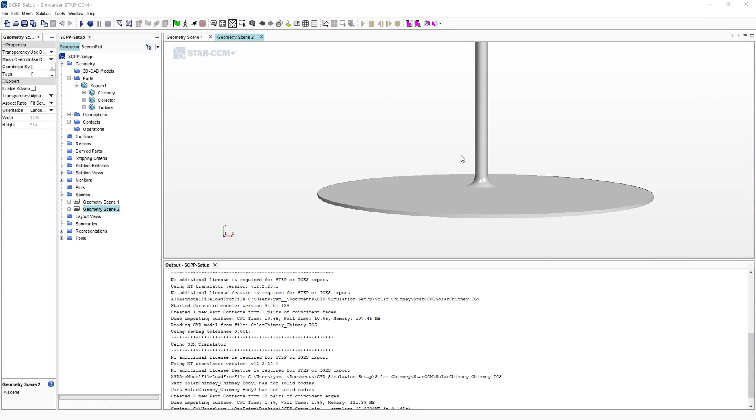Once you import your SolidWorks model into your STAR-CCM+, you should be able to visualize your geometries.

To visualize this, you just go here and click geometries, and it will show up. You can zoom in and zoom out.

Here you have the assemblies, and you have different components. If you click on it, you have the chimney, the collectors, and then the turbine.

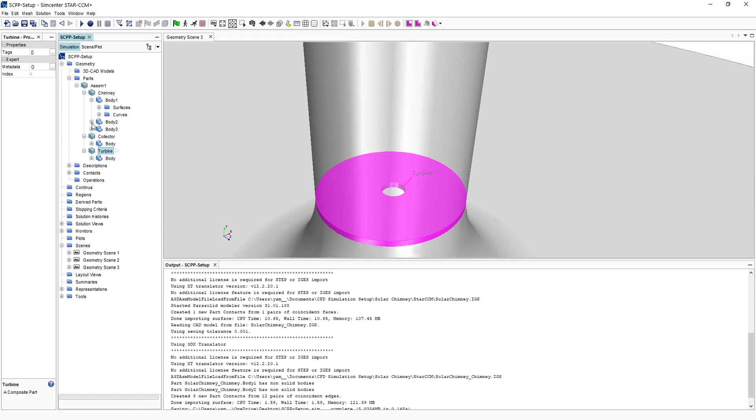If you expand out your chimney, you have different bodies inside.

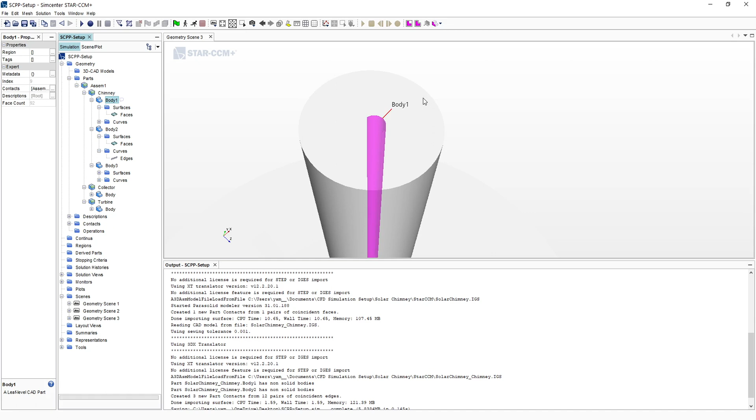This chimney will be just one whole chimney. Remember that we created two cylinders, and because of this we now have two of these surfaces. These surfaces will not serve a purpose for your simulations, since it's actually just one whole chimney, so we can remove this.

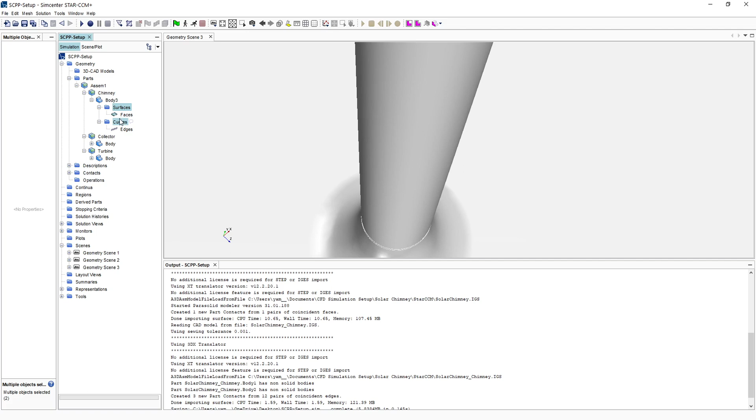So we have the remaining surfaces, and if you wish to simplify it, we can move this folder and place it inside chimney. You can rename this one as a body.

What we can do at this point is define the boundaries. These faces represent faces of the entire chimney, so what we can do is split it. If we split by patch, we are able to see this chimney made out of different surfaces.

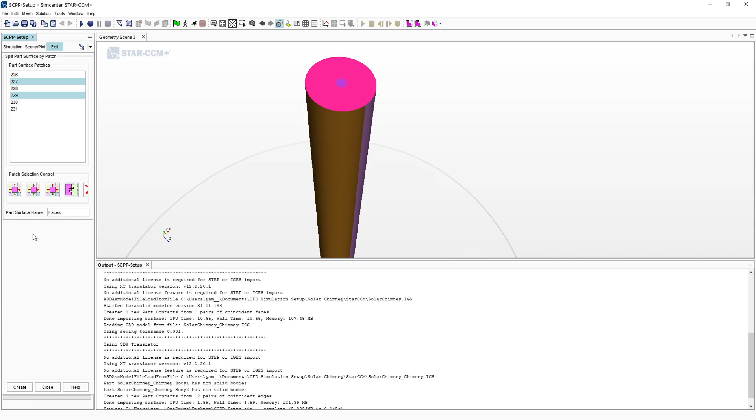This will be the outlet. You can select this one, and select this and this, both of them, and name it as outlet.

These are the chimney wall. You can select it as well, both of these, and name it as chimney wall.

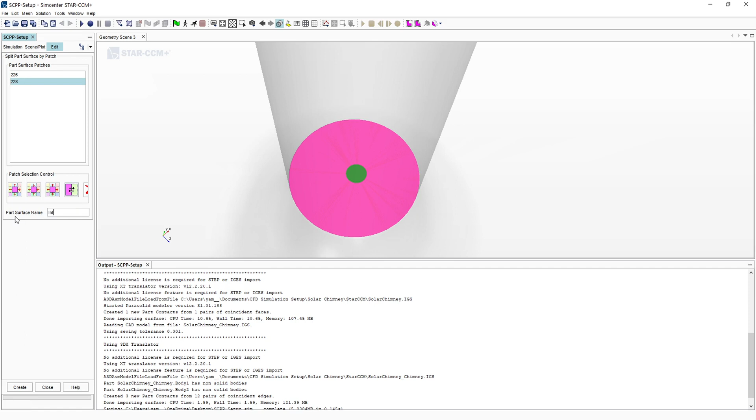Lastly, if we zoom in, we have this, which represents the interface between your rotating turbine regions and your chimney, and the bottom of the chimney. So you can say this is the interface, and the remaining...

...you can name this one as the inner surface.

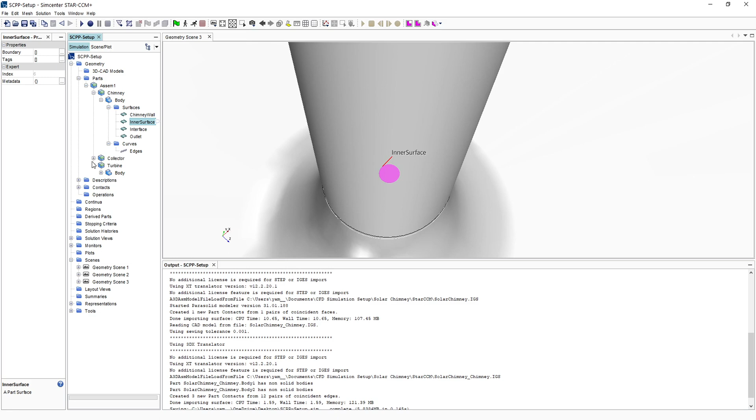Now we will do the same to your collectors. This is your collectors, and the collectors are made out of different faces as well, which you can split.

So this is the interface between your collectors and the rotating turbine. You can name it as an interface.

This is the ground, and this is the inlet.

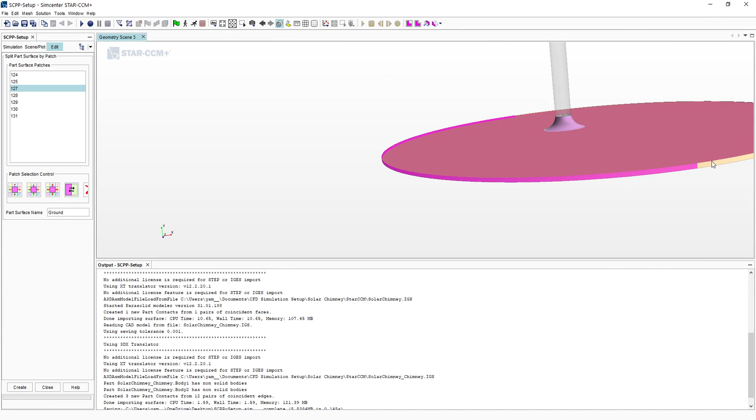So there are two parts. This is the ground, and this is the collector itself. Now the remaining are either the cover or the solar chimney, and the rest - you have the turbine base, which you can name base.

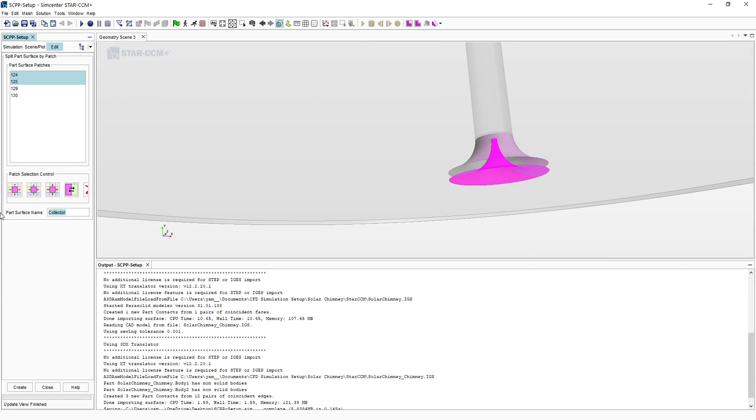You can combine these two and your collector surface, combine it, and call it collectors. Alright, so that's your collectors.

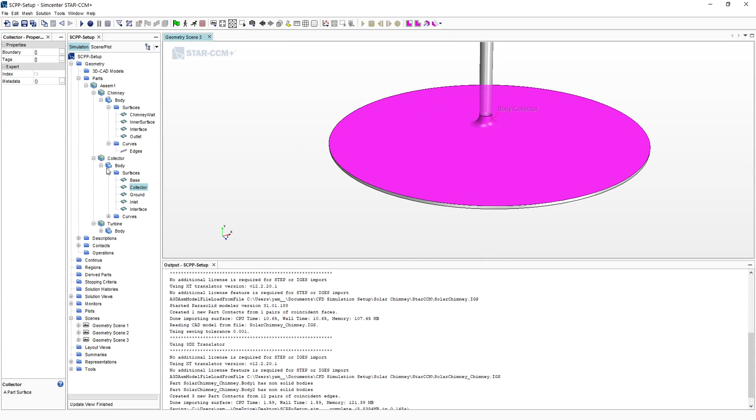Now we move on to the turbine.

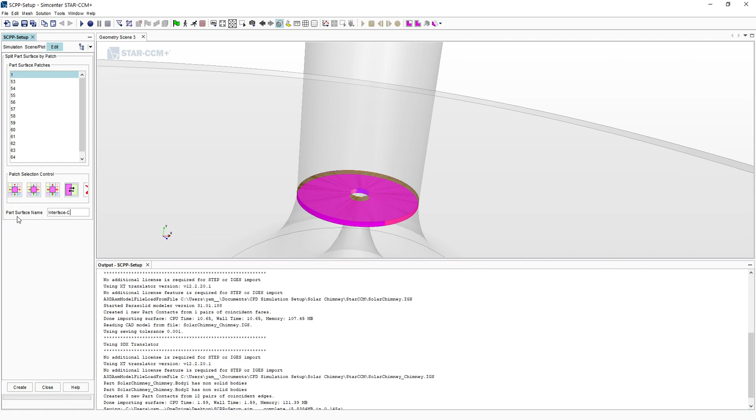So this is the interface between your turbine domain and your collectors. The top part between is the interface between your chimney and your turbine domain.

You have these two, which you can name as a wall.

So the remaining really are the blades, and also the body of the blades, which you can collectively name as blades. You can do that, and name it here.

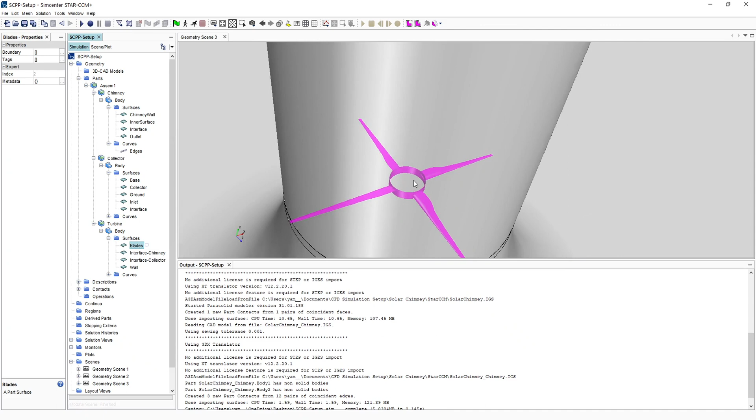So that's how you define and provide your naming for your boundaries.

So the next step is to create new regions.

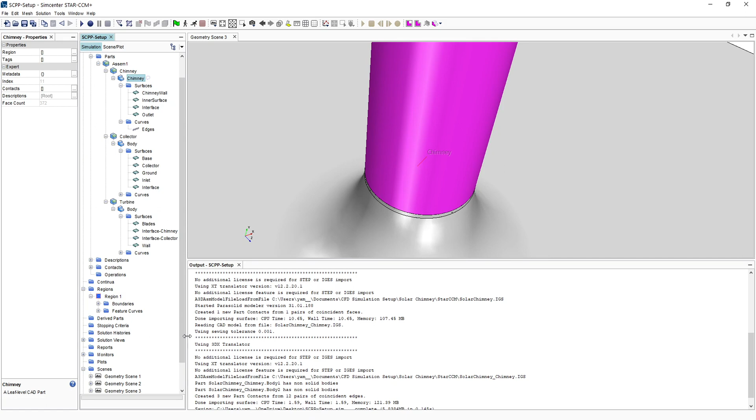We will have regions for the collectors and regions for the chimney, and they are not moving. You can rename this one as chimney, as collectors, as turbine.

We can simplify it by removing it from the groupings, so we can simply delete this. Now it's much simpler, and we should be able to recognize the different parts here.

So we will put the collectors and chimney together and name it as fluids.

We create new regions for the turbine, and name this one as rotating.

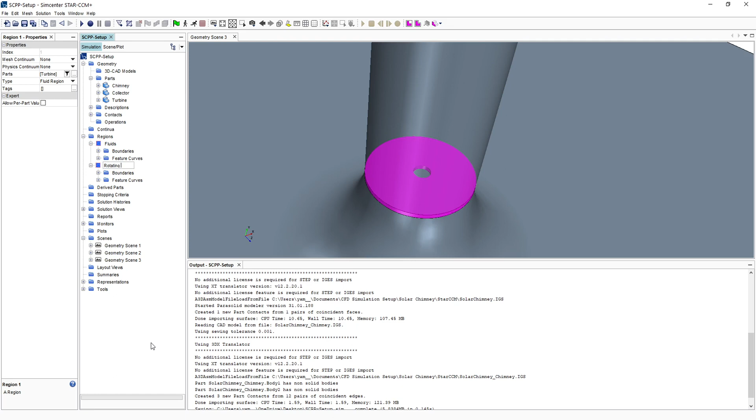So now we create a new physics continua. This is basically defining the boundary, the governing equations to solve the solutions. This will be a three-dimensional problem.

We can have a gas inside, so it's implicit unsteady. We can use segregated flow, constant density with Boussinesq. You have to select the fluid temperature model, use a turbulent model, and use K-epsilon.

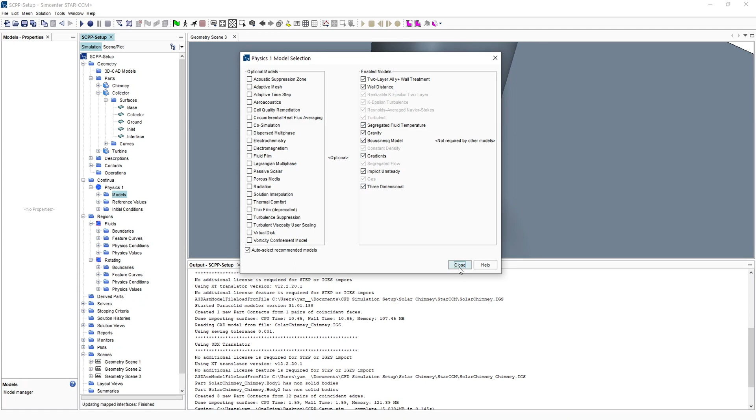So this is all you need in order to set up your problem, and you can name this one as gas.

You need to double check your gravity, make sure your gravity is along the y direction. So put here your gravity.

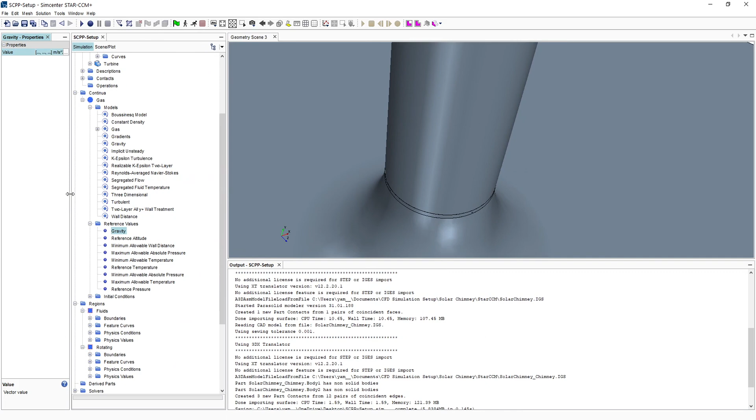You have to also set your reference temperature correctly. This will be the ambient temperature, and you can set this one to be 300. So you have the initial temperature at 300 as well.

Having defined all those, we can move on to defining the boundary conditions.

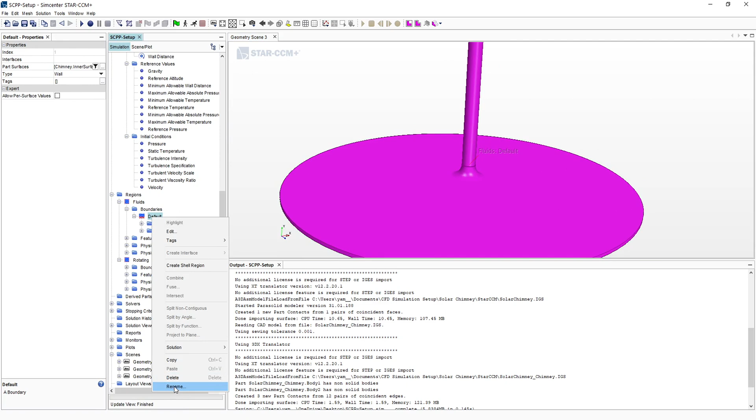The default is wall. So in your fluid domains, what will be wall? You can name this one your chimney wall, and select your chimney wall.

Create new - this is your collectors, so you can select collectors. Collector will be wall as well.

And these two bits, we're going to have them acting like a wall, with adiabatic thermal specifications. So we're assuming there is no heat transfer through the wall, both collectors and the chimney.

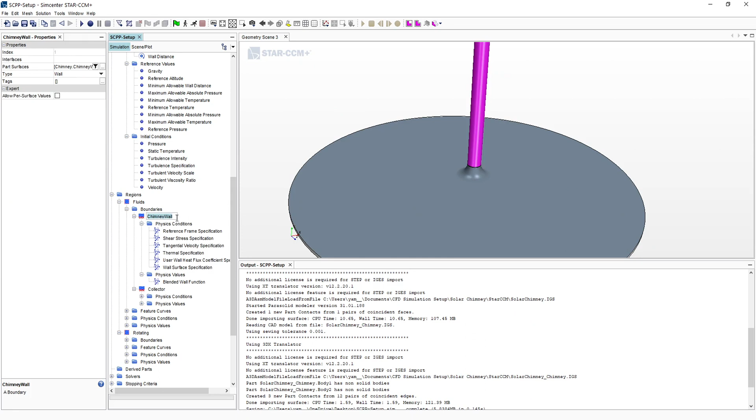Now move on to other boundary conditions, your outlets. So this is the pressure outlet.

We define the inlet using the pressure outlet as well.

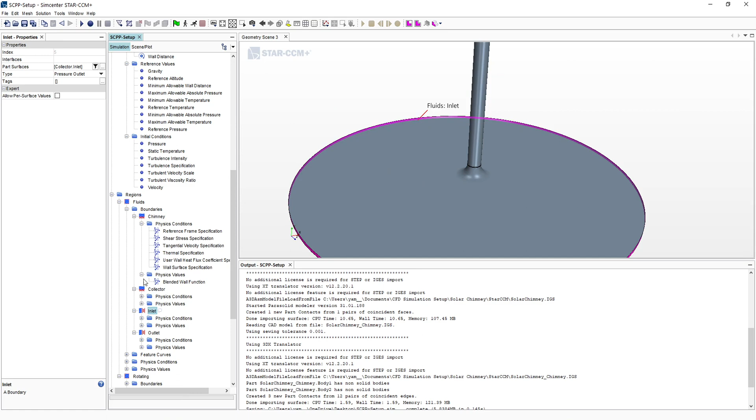So your ground will be a wall as well. Because the ground absorbs heat, you need to include a heat flux for your ground, and it would have a value of 300.

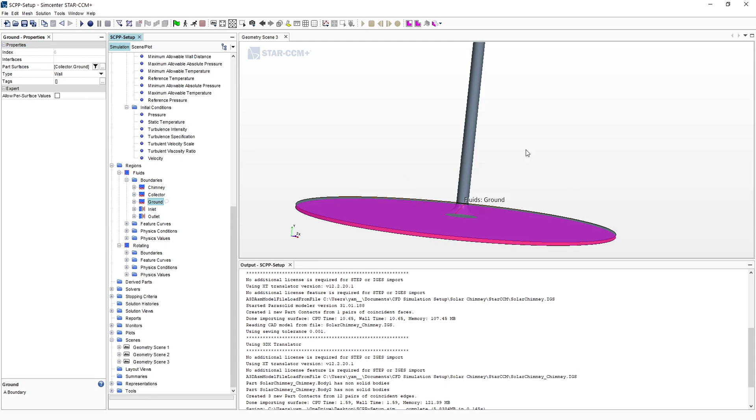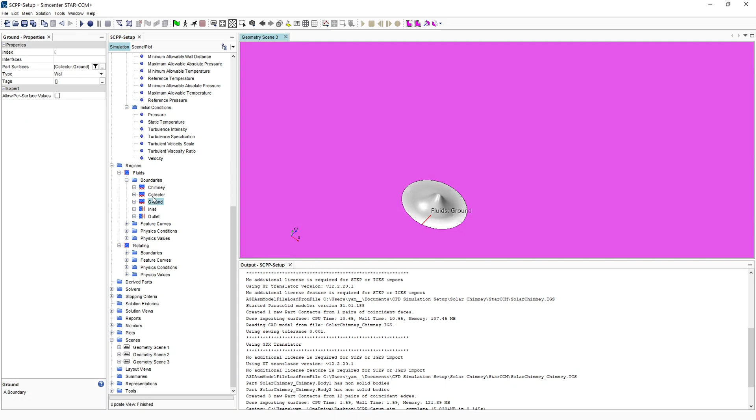Now we still have remaining boundary conditions that we need to specify. So we need to specify the base as well. The base will be a wall. We can assume that this is the base, and select your base, and it is adiabatic as well. It's not absorbing any heat.

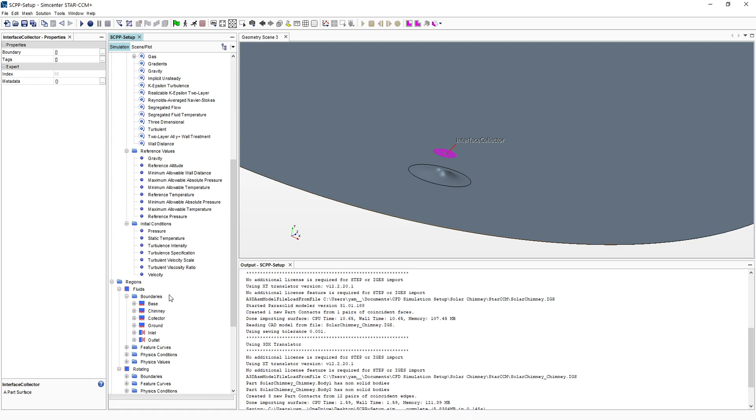Now the remaining bits are the interfaces. To differentiate between your chimney interface and your collector interface, we can name this one as interface followed by the name of the component. So you create a new wall and select the interface. For chimney, and interface for collectors.

Now we still have one, which is the inner surface, and it is a wall as well. Your inner surface, this is the inner surface of the solar chimney. So we fully define the boundary conditions for your fluids.

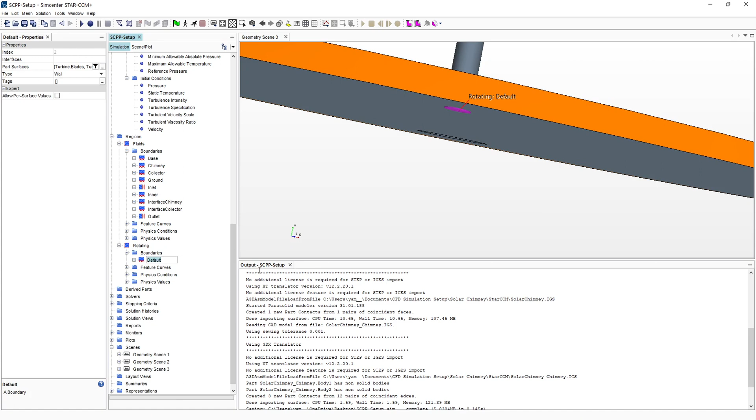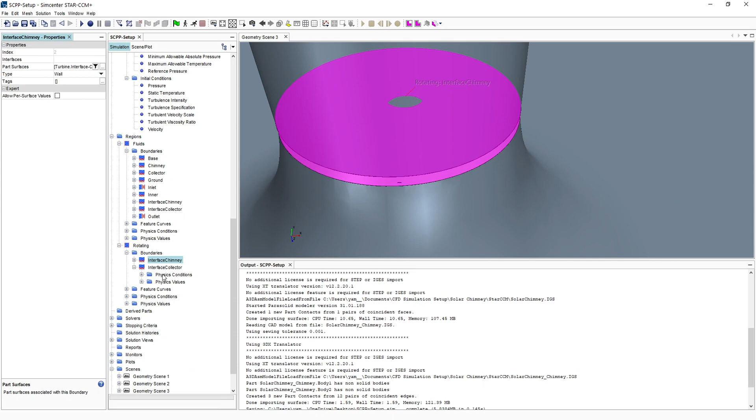Now we need to define for your rotating zone. We got the interface with chimney, and the interface for the collectors. For chimney, we have to select this; for collectors, we have to select this. Obviously, there is a side wall. These are the side walls. They rotate together with the turbines, so we might consider this one to be a symmetry plane because it rotates together with the turbine.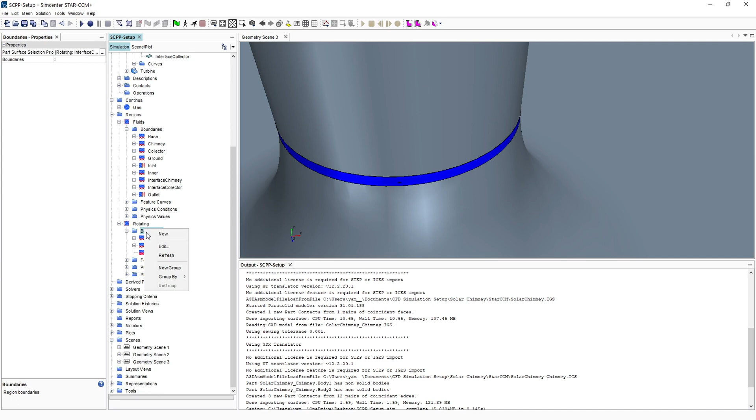Now our blade, finally, the blade itself will rotate, and it is a wall. At this point we need to connect the interface between the fluids and the rotating zones. So for chimney and chimney, we can select both, right click and create an interface. This interface will create a connection between your rotating zone and your fluid zones. So you do the same for the collectors, right click both of them and click create an interface. This basically fully defines the boundary conditions.

So the pressure inlet, we need to check what's the temperature. This will be 300, the temperature of the fluid entering into the outlets.

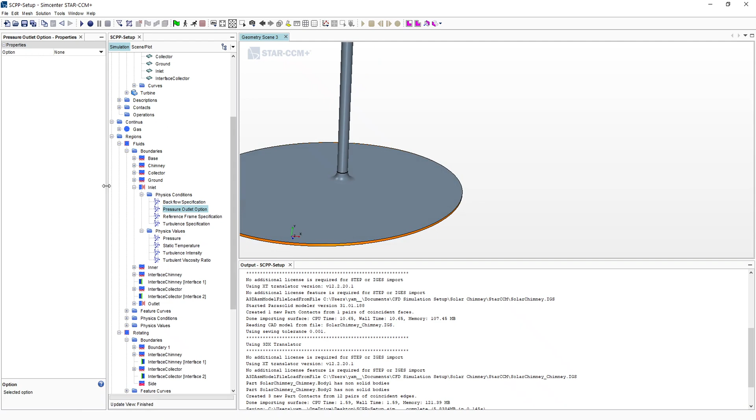Now the zone is rotating, which means that we need to prescribe configurations that allow the zone to rotate. So we can go to tools here, go to motions, right click, and select rotation. Over here we can specify the rotation rate of these turbines. Say it is rotating at 100 RPM.

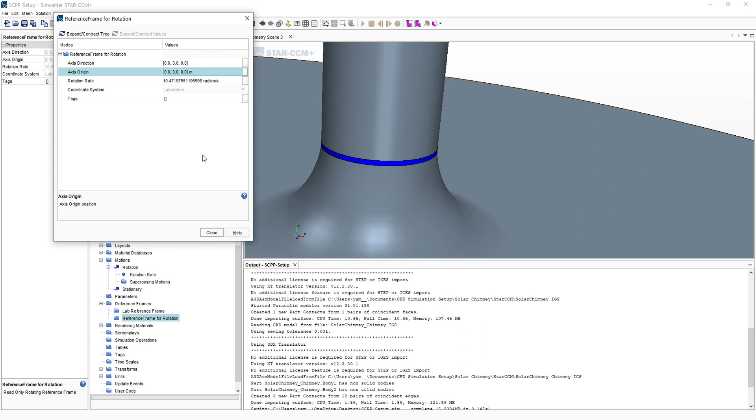Now we need to define the reference frame for your rotation. So here we define the axis of the rotation. Clearly it is rotating about y, so we can place here as 1. This is where we define the rotation. So you place this one as 1, assigning the domain to rotate around the y-axis, and you're defining the axis of origin. This one you can define to be 10, because your turbine domain is resting at a height of 10.

After you define this one, you can assign your rotating motion specification here to be rotation. This will link and assign your rotations according to the specifications that you include in your tools section here. So we fully define our boundary conditions, we fully define our governing equations.

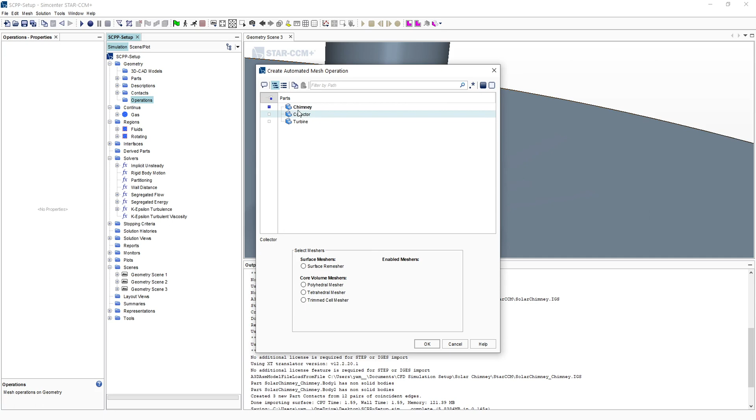So the next step will be creating the mesh. For the meshing, how we can create a mesh: we can go to operations, click new, automated. We can choose here, say we wish to mesh this part by part, which means that we will mesh chimney first using the meshers. There are three types of mesh you can use: polyhedral, tetrahedral, and trim cell.

So trim cell possibly would be a very good option here because we're trying to use as little mesh as possible at this point. Now this prism layer is the option to create boundary layers. So click OK.

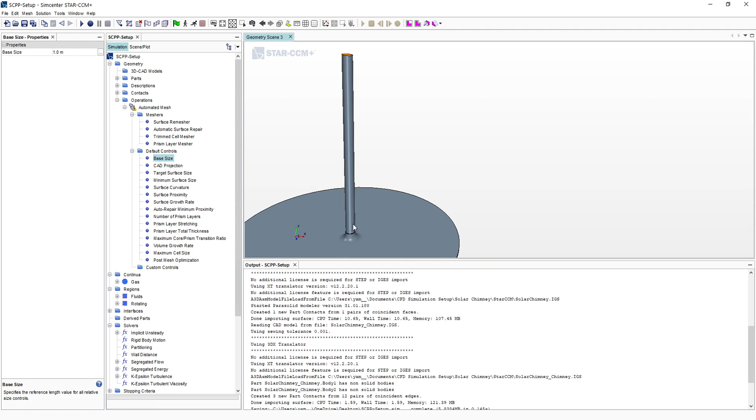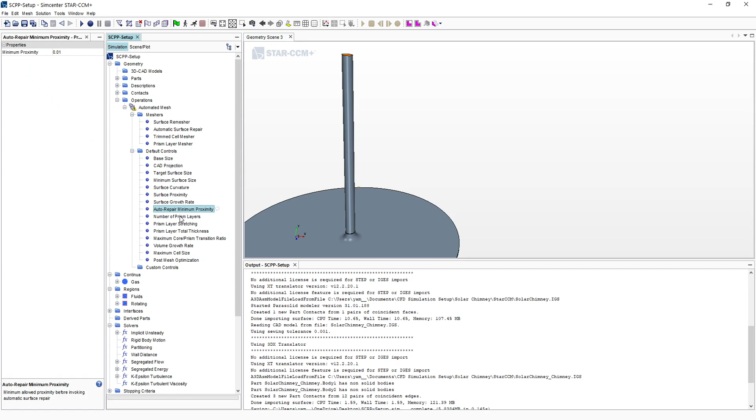Here we can specify what will be the base size. At the first start, we do not want to have so many cells, so it will be a good idea to use a big base size in order to reduce the cell count, the mesh count. So I thought we can use this one as 10. Obviously, you need to include prism layers, this is the boundary layers. We can include 10.

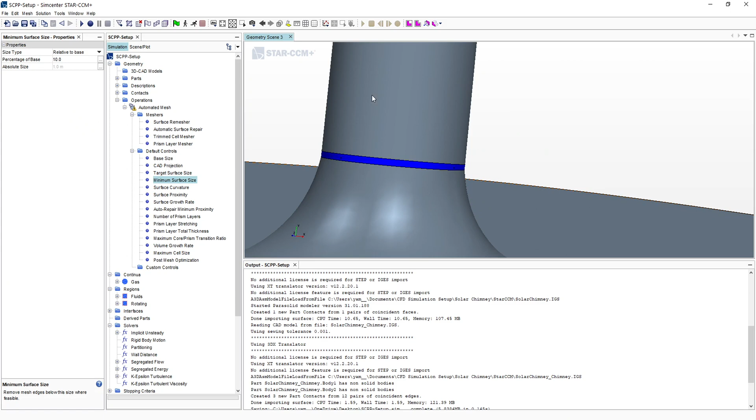This automated mesh will mesh your chimneys. However, we need to take note that very close to this rotating zone, we have very small components. So it is likely that we will mesh your rotating zones here with small, tiny mesh. This means that close to this surface, we're expecting to have more mesh, more tiny mesh on this surface. So what we can do is create a custom surface control here.

We create a surface control here. Basically, select your interface, inner surface and interface, so we're selecting this surface, and assign custom values.

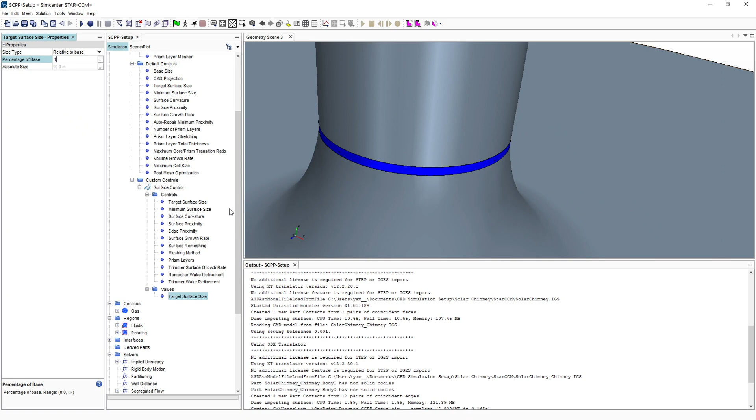This could be something smaller than your base size, so it could be 1% to 5% of what will be the target base size of your mesh inside your chimneys. Now this is the interface. You can disable the boundary layers as well on this surface.

So you can execute. Executing this, the solver will generate the mesh in the domains, and now we can visualize the mesh.

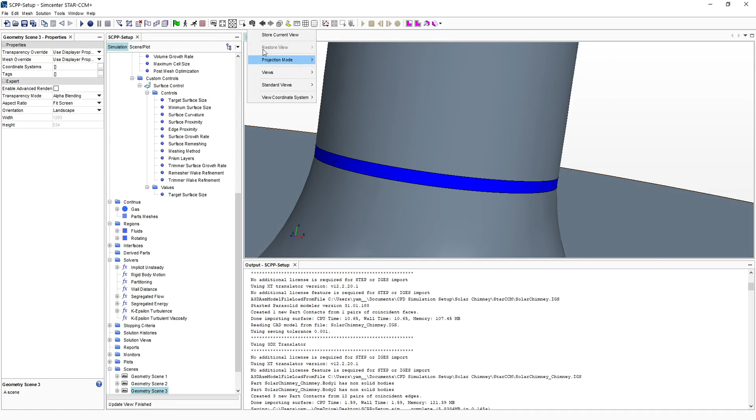We can go to mesh, and this will show you what the mesh looks like. So we have assigned a very coarse mesh. This is what it looks like, and we can see some mesh distributions, more mesh distributions close to the boundary — these are the boundary layers.

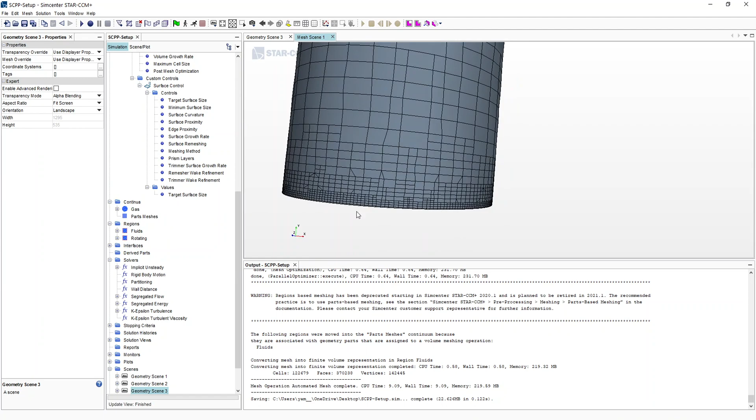Over here, close to the interface, we can see a tinier mesh as well, due to the fact that we assigned a smaller mesh size here.

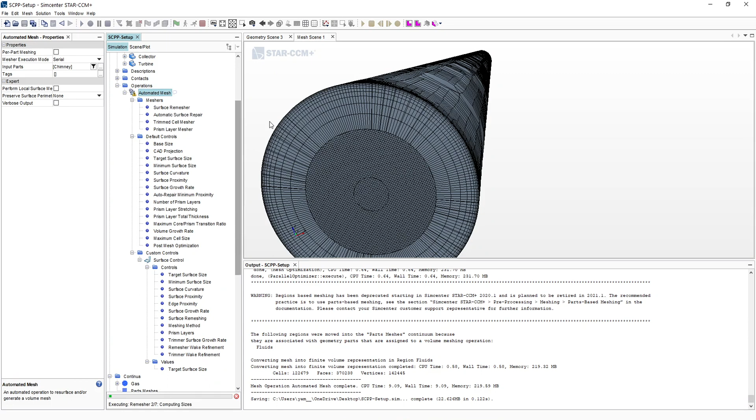So here is not very ideal. In fact, we can try to optimize by reducing the number of prism layers to just 5 and see what the result looks like. This is probably too coarse — again, too coarse. We definitely need 2%.

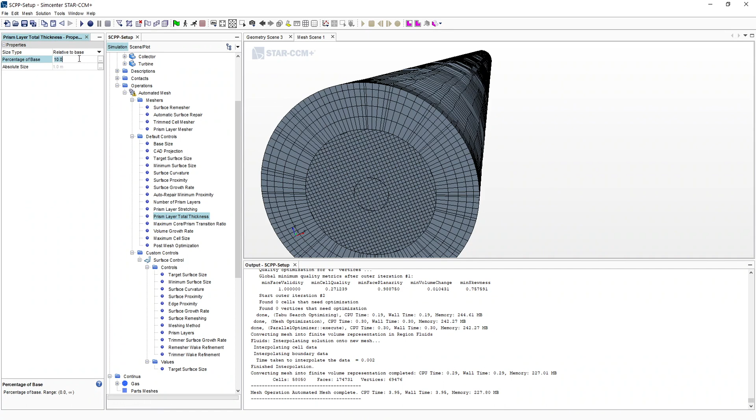Ideally, the prism layer should not be too thick either. This represents the prism layers, and we can reduce this one. So now we achieve better results.

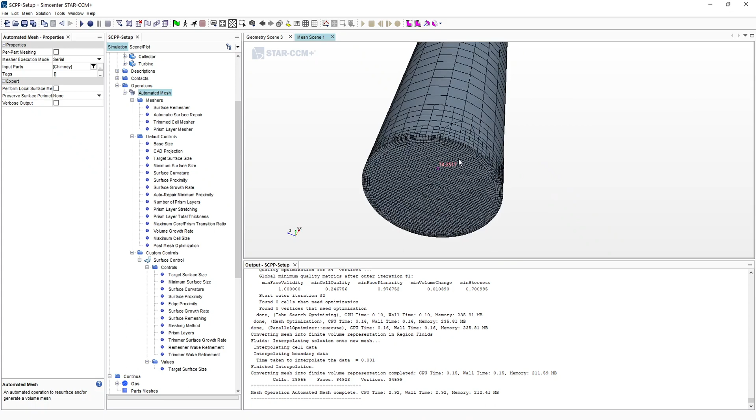This will be the mesh distribution at the interface. This is what it looks like from the top — for the top we have less mesh, and we prescribe more mesh here, due to it being connected with your rotating zones.

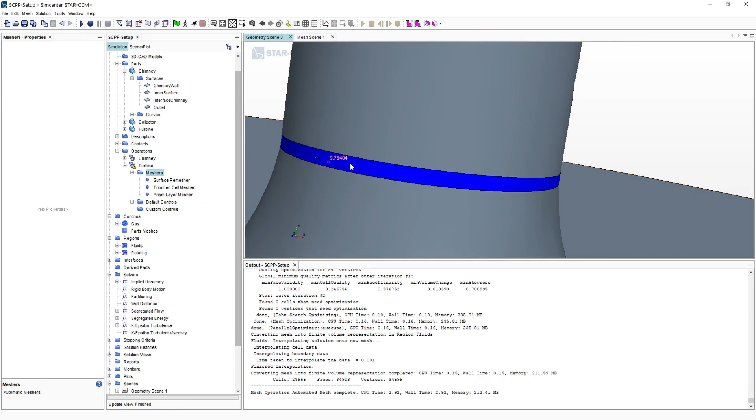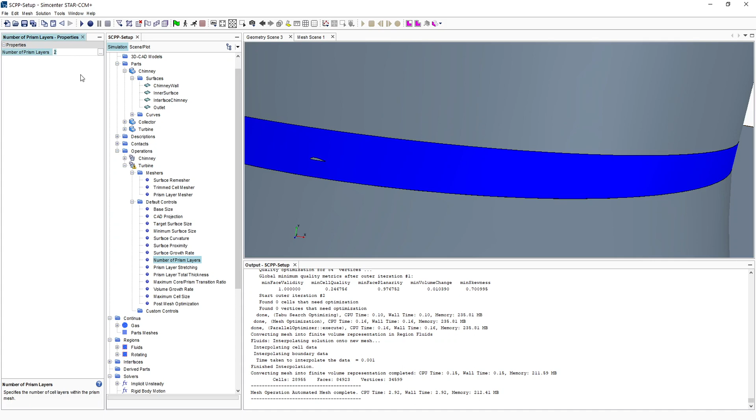So you can name this one as your chimney mesh, and create a second mesh operation for your turbine. Rename this one as your turbine. These are the regions, the rotating zones, and these are the crucial regions — we will need a small base size to capture and create more mesh surrounding your turbine blades. You can specify the prism layer.

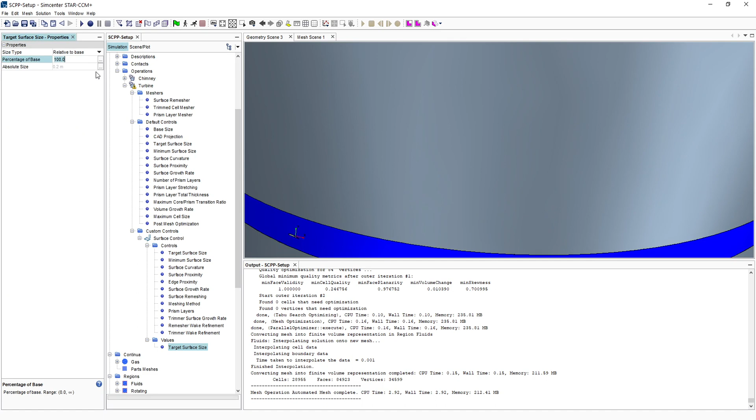So we probably need also more mesh close to your turbines. It's a good idea for your blades — we prescribe more mesh on the surface of the blades so that we can capture the flow around the blades. What we can do is reduce the percentage of the base, say to 10%. Now we can also remove the boundary layers, the interface, and the prism layer at the interface.

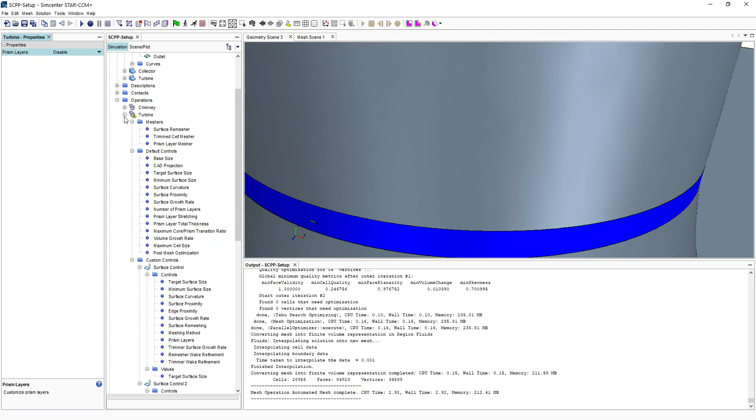We can create a separate surface control for the interface, and now we set that there are no prism layers. So let's mesh this and see what it looks like.

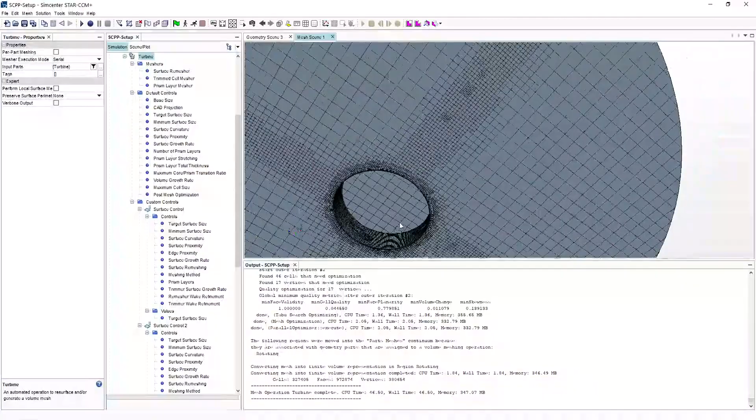That took a while because there is more mesh in the turbine region. Now we can see how it actually looks like. Because of the surface control we prescribed, we can see more mesh at the blade there.

Now, if we wish to see how it looks in the middle, another possibility is to define a new plane. Define it at 10.2 perhaps, and you can name this one turbine, so we cut through the turbine.

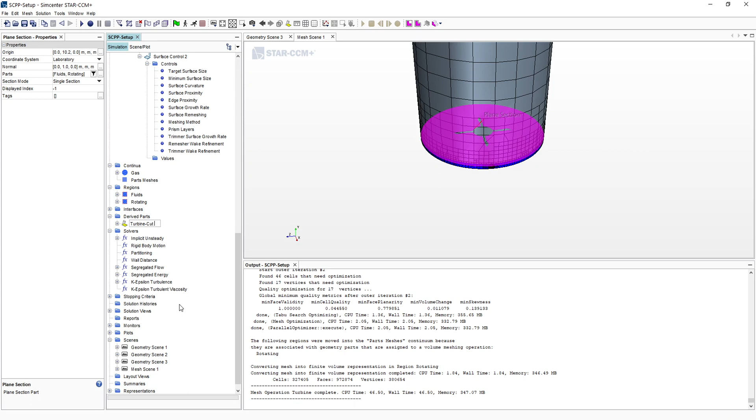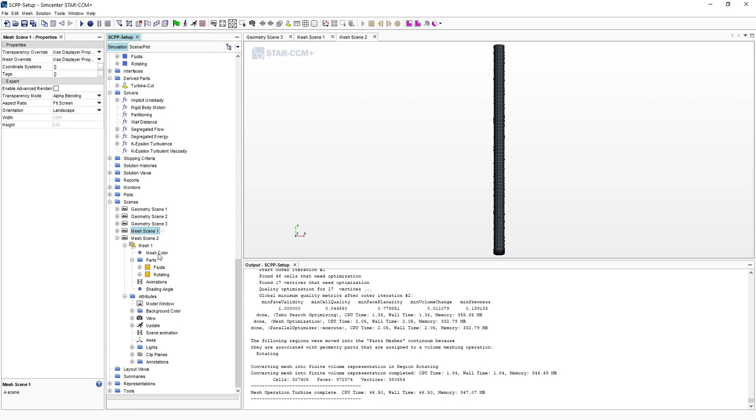And define your mesh, which should be based on that turbine cut, right? Now we can use the standard view. So this is what the meshing looks like, cutting through the turbine domain.

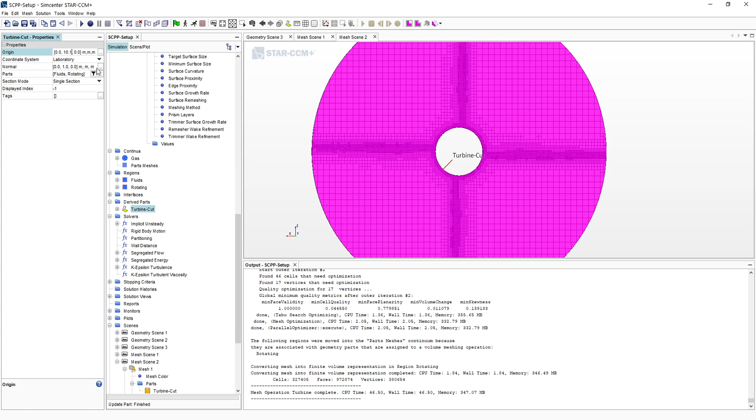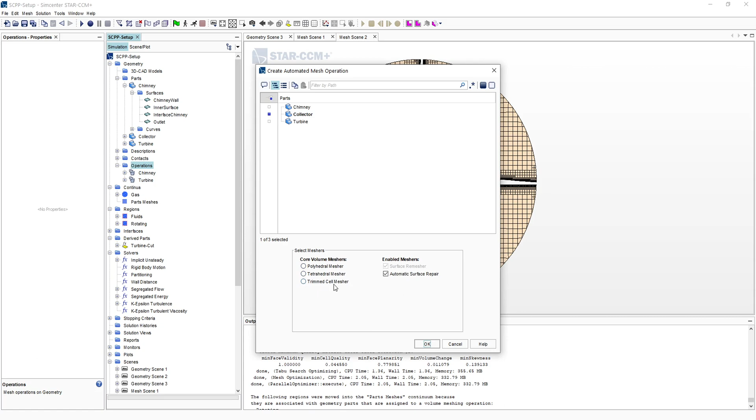Lastly, we can create meshing operations for your collectors. We're going to use the same trim cell with prism layer as well. This will be the meshing in the final part, your collectors. Since it's a big collector, we can use a larger size as a base.

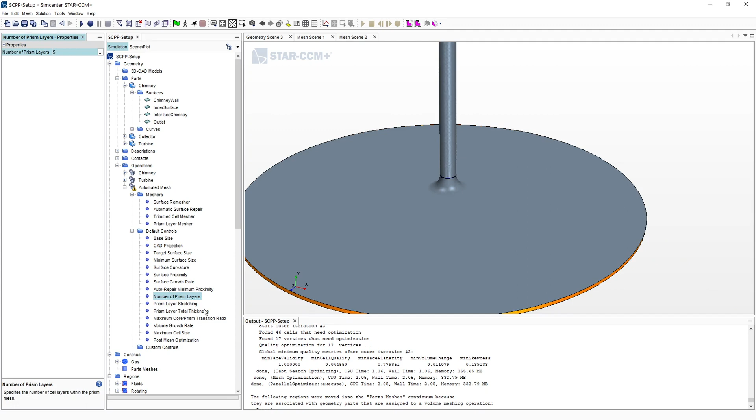We can try with 20 and perhaps put 5 prism layers and see what it looks like. Now we need again to consider a surface control for the interface — we know we're going to need a tinier mesh there, and we can prescribe this one to be, it was 2%, right, so 5%. And this one is the collectors. Execute and see what result we get.

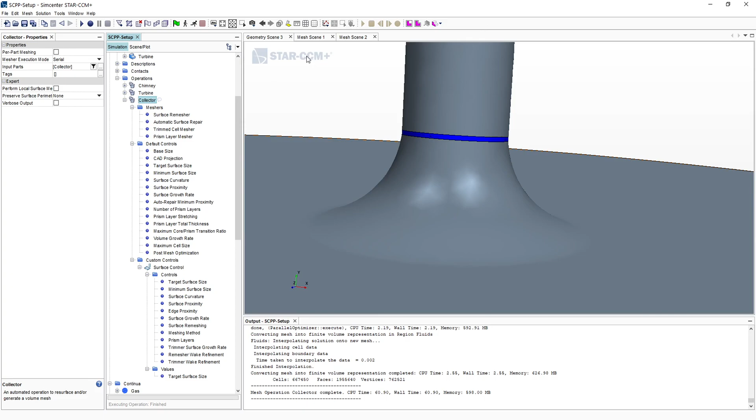So this is what the mesh looks like overall. We can actually create another plane to visualize the inner sections of your mesh. So we can go to derived part here again and create a new plane, create a new section.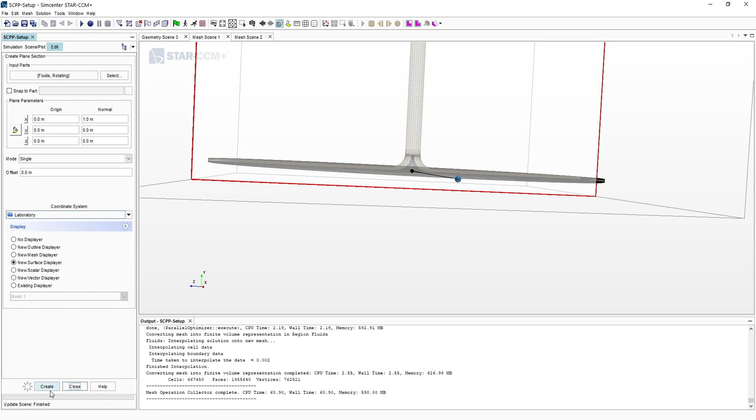So this is cut through the body, right? You can...

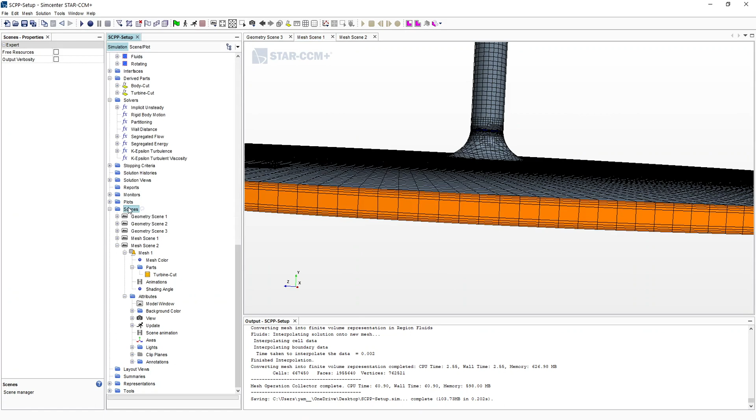So we could try to visualize, create another meshing scene, new meshing scene, that is based on our new derived part. So disable this. So this would be what the meshing looks like inside the models.

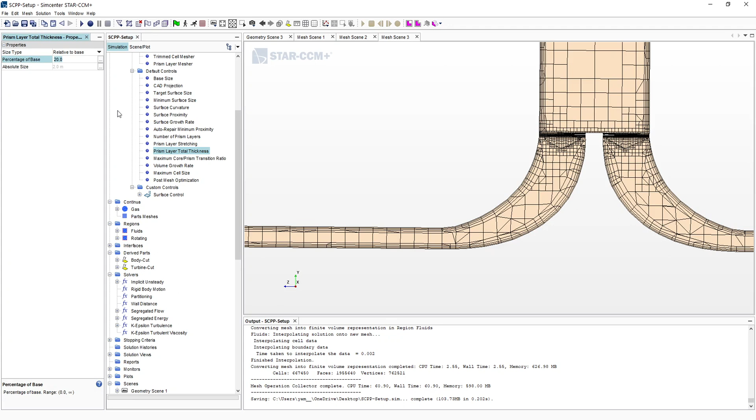So there's a possibility, in fact, we can include more layers, prism layers inside our collectors, and we could go to and perhaps increase this one to 40, and increase more layers, maybe 7, and see what it looks like.

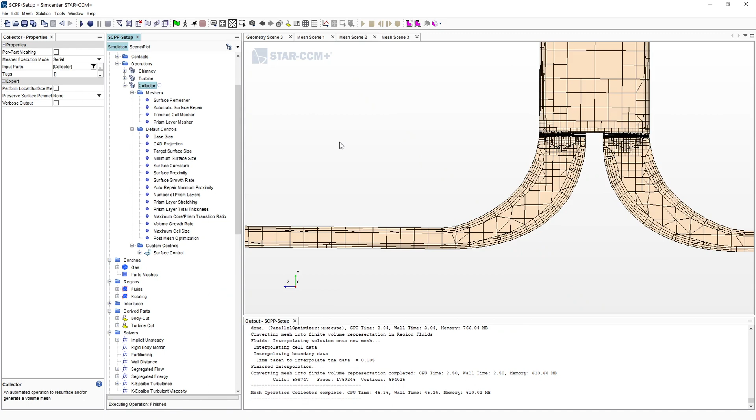So these are the final results.

And now we are actually ready to run the simulations. So a few things that we should consider before running the solver itself. This will be the time step needed. How many iterations per time step? When is the simulation stopping? 1 second? The maximum amount of steps.

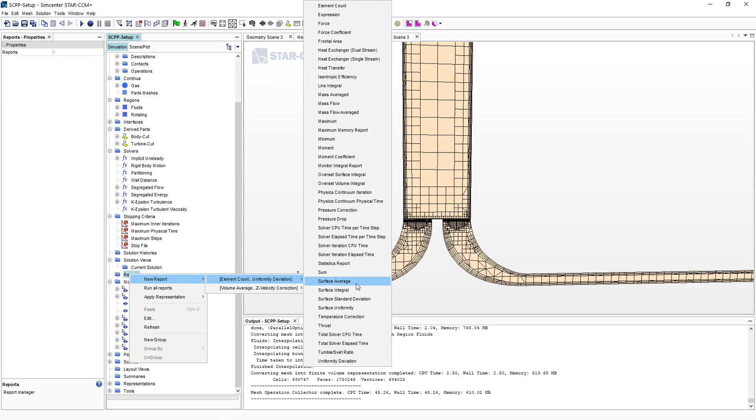Okay, we need to possibly monitor a few parameters while we're running the simulations. So this report function is very good to get the surface average of some parameters. So this could be the mass flow rate at the outlet, so this will output what will be the average flow rate that is leaving through the outlet boundaries.

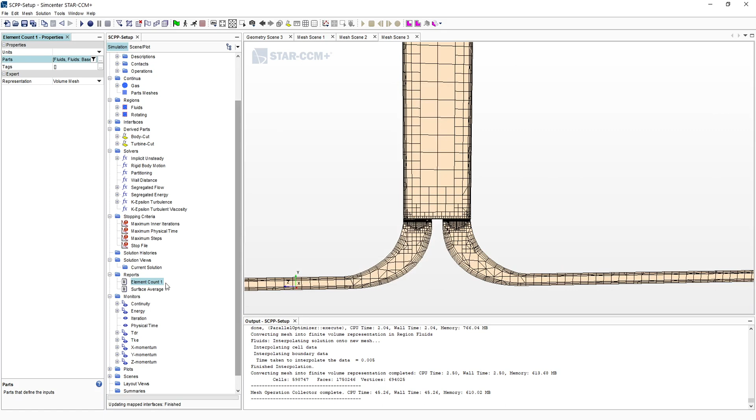We can use this one, in fact, to get the mesh count of your regions, right? We can run this report and get some idea how many cell counts are being used in each region, right, in your model.

Pressure drops between the interface. So it would be the inlet will be the collectors. Chimney will be the outlet, lower pressures. So there is a pressure drop through the turbine, and we can compute that one as well.

We can do the moment force. Okay, and look at the force. A way to define the axis. This will be the force on your turbine.

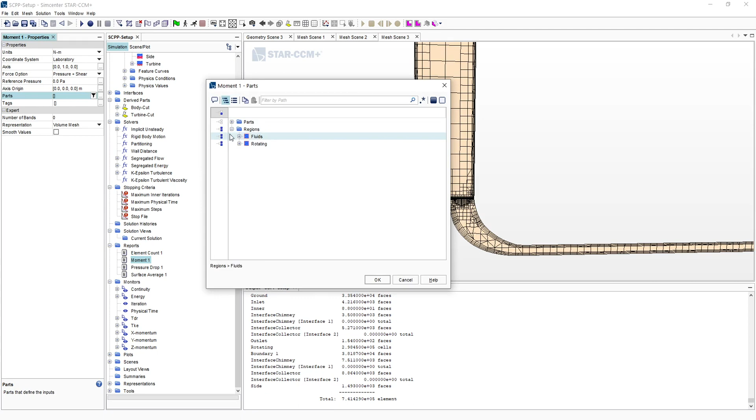Boundary one. So this could be the force on your turbine. So we can monitor that one as well.

We can actually create and monitor the plots from these moments, okay, and as it runs, as the simulation progresses, we can see how the moment actually changes, right?

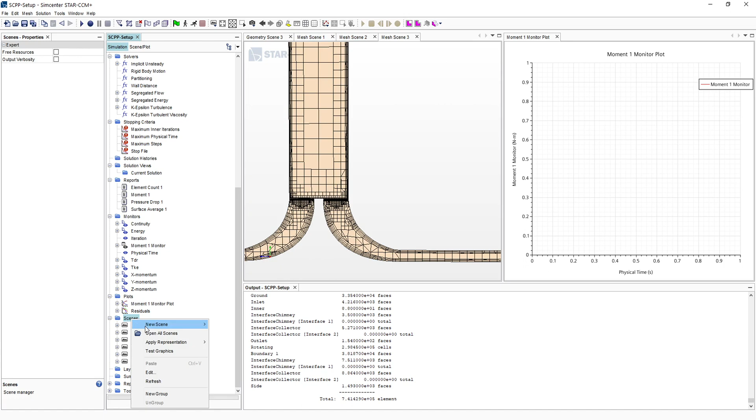Now, of course, we can create the velocity contour, the vector contour, the kind of things. Then we can go to the scene here. Say we're interested to look at the velocity contour. We can go to a scalar, here and choose...

So we wish to see actually how the velocity changes as the turbine rotates. So we can choose that, choose the velocity at the turbine part. Can even rename this one as velocity. Okay.

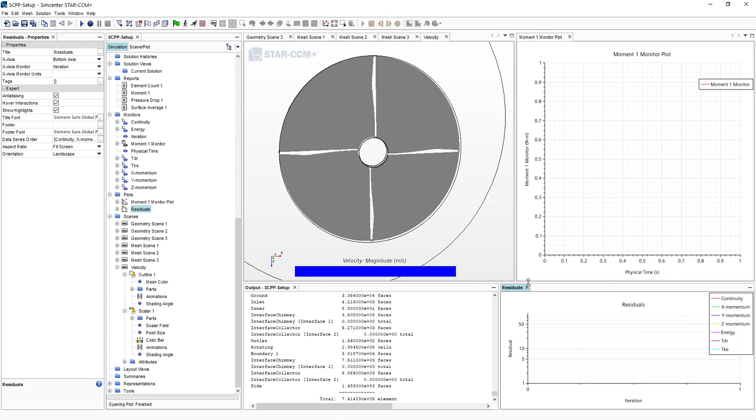Now we got many things already. We're almost ready to simulate. So we can open the residual, and this allows us to track how the solution is progressing through the iterations. Okay.

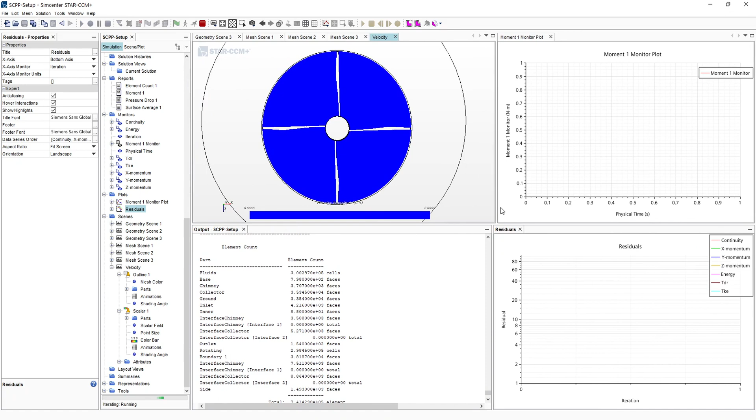So to simulate this, we initialize the solutions, right? And we run. As you can see, the rotations at the very first time steps.

Now we might need, in fact, more iterations per time step in order to avoid the solution being blown out. So we can increase the iterations to 20.

So we can observe here, this is the residual of each governing equation for continuity, momentum, and energy equations, as well as the turbulent equations. So right here we have the graphical representation of this residual as a function of iterations. Now we increase the iteration to 20.